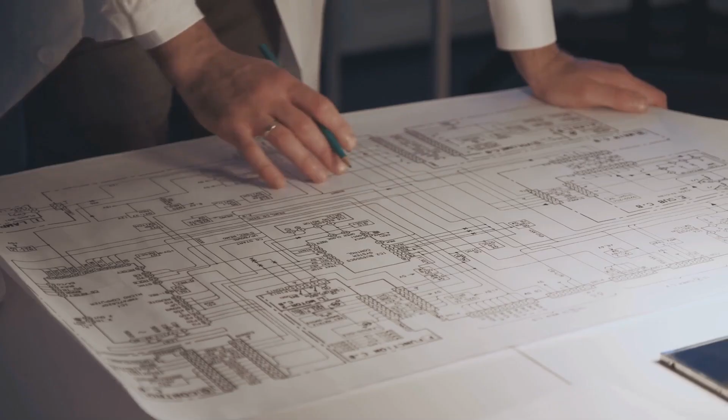But have you ever wondered how these incredible structures come to be? How a wild idea transforms into a twisting, turning reality? It's not magic, it's the result of brilliant minds, powerful tools, and relentless creativity. Teams of engineers, designers, and builders work together, solving problems and pushing boundaries.

The first roller coasters were Russian ice slides in the 1600s. Simple wooden ramps, packed with snow, letting gravity do the work. The French added wheels, making the ride smoother and faster, and by the 1880s, America had the Switchback Railway at Coney Island, a sensation that sparked a new era of amusement.

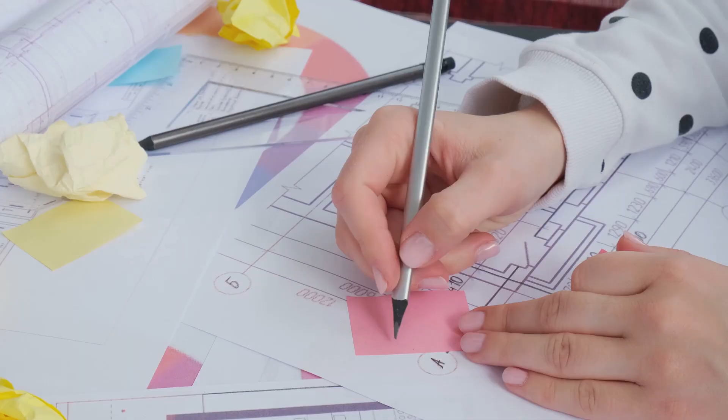Every coaster, from rickety woodies to sleek steel giants, starts with a single spark, a what-if moment. What if we could go higher, faster, or twist upside down? What if we could launch riders like rockets using magnets instead of chains, blasting them forward in an instant? What if the track dove underwater or soared through fire or spun riders in ways they'd never imagined?

Designers dream big, imagining not just the ride but the story, the theme, and the feeling they want to create, turning steel and wood into pure emotion. It's not just about speed or inversions, it's about crafting an emotional journey, a memory that lasts long after the ride ends. These creators are architects of adrenaline, fueled by wonder and a passion for pushing limits, always searching for the next big thrill.

Every ride begins as a wild idea, a sketch on paper, before physics and engineering bring it down to earth and make it real. And that's where the real adventure begins, when imagination meets reality and the ride of a lifetime is born.

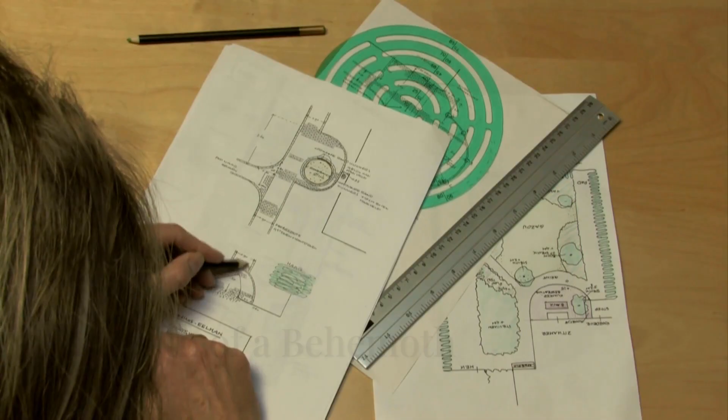With the big idea in place, designers gather around their desks, pencils in hand, and start sketching. Rough, energetic drawings that capture the ride's flow. These early sketches are where imagination runs wild, and every line on the page hints at the adrenaline rush to come. They map out drops, turns, and loops, translating excitement into visuals. Each curve and twist is carefully considered as the team imagines how riders will feel at every moment.

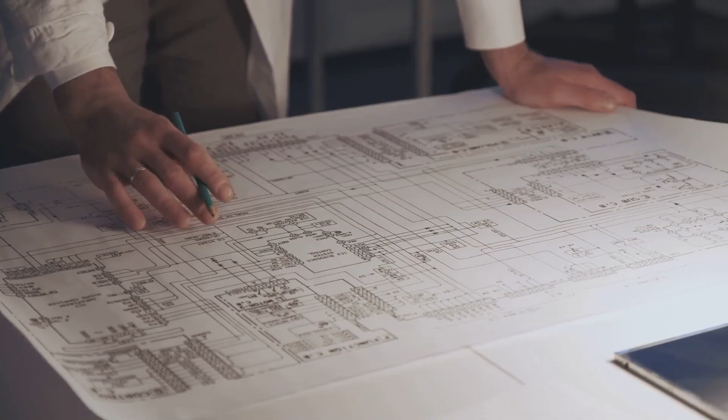But reality sets in. The ride must fit a specific plot of land, weaving around other attractions and obstacles. The available space is often irregular, forcing designers to get creative with the layout. It's a massive, three-dimensional puzzle, balancing creativity with constraints like height limits, noise regulations, and budgets. Every decision is a compromise between what's possible and what's permitted. The raw vision is refined, every square meter counted. Designers must maximize thrills while making the most of every inch of available space.

Engineers step in, running calculations on G-forces, balancing thrilling airtime with safety. They analyze how the ride will feel, ensuring it's intense but never dangerous. Using advanced software, they model the train's speed and forces at every point, ensuring the ride is both exhilarating and secure. Simulations help predict how the coaster will perform long before a single piece is built.

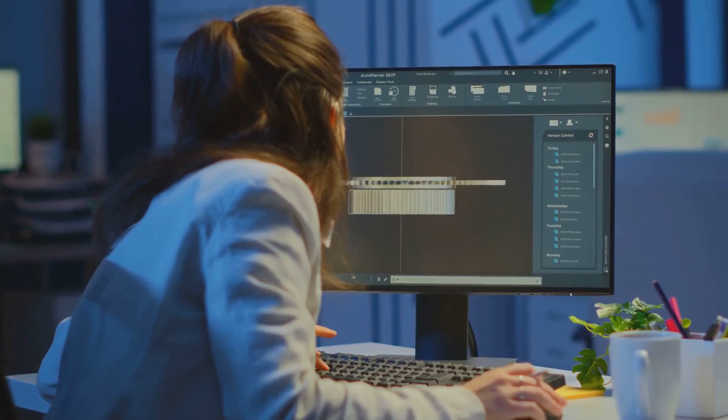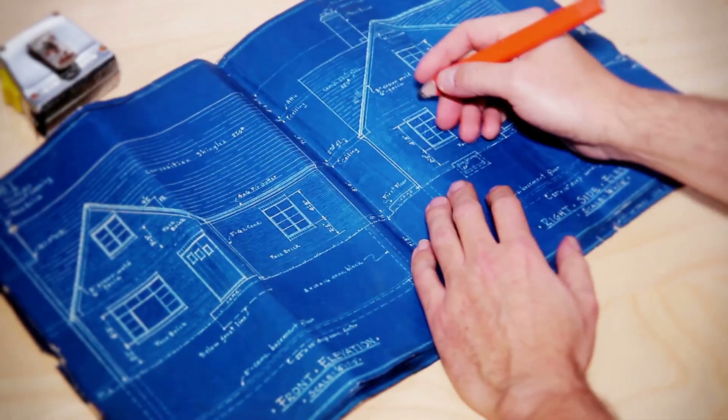The result? Incredibly detailed blueprints, filled with technical notes and precise measurements. Every support, track segment, and bolt is specified. Nothing is left to chance, each component is accounted for. The blueprints show exact angles, heights, and materials down to the last nut and bolt. These documents are the master plan, the culmination of months of creativity, engineering, and science working together. They turn an abstract dream into a buildable reality, bridging the gap between fantasy and the physical world.

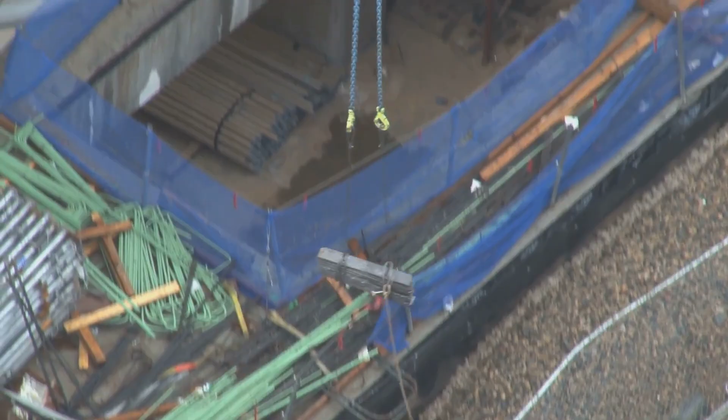Now the vision is ready to leave the drawing board. The design team hands off their plans and anticipation builds. The next step, bringing it to life, piece by piece. Steel arrives, and the first supports rise from the ground. The journey from sketch to steel is about to begin, as the behemoth takes its first steps toward reality.

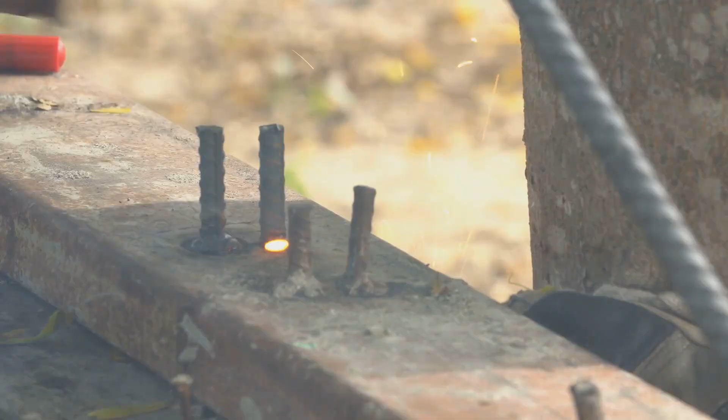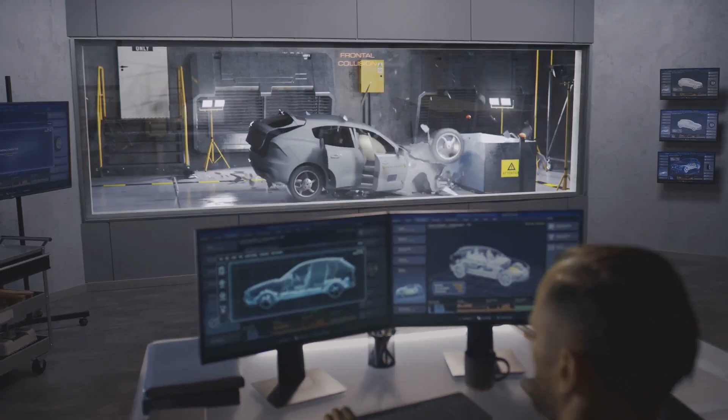Before any steel is forged, before a single bolt is tightened or a track is laid, the journey of a roller coaster begins with imagination and precision planning. The entire coaster is first constructed in the digital world where ideas take shape and concepts are brought to life on screen. Engineers meticulously craft a flawless virtual model, capturing every bolt, every curve, every seat, and even the smallest design details. This digital twin allows them to test the ride from every possible angle.

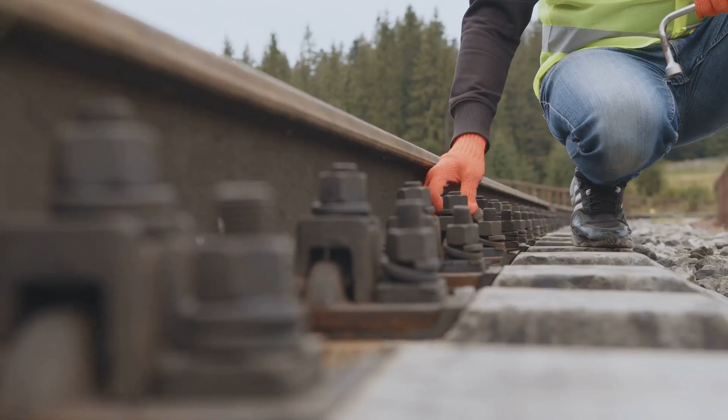Running countless simulated trains to analyze G-forces, speed and safety under a variety of conditions. Adjustments are made in the software, tweaking turns, raising hills, and refining the experience to maximize both excitement and comfort for future riders. Advanced simulations check clearances, ensuring that no part of the train or any rider ever comes too close to supports, scenery, or other elements. Safety is always the top priority.

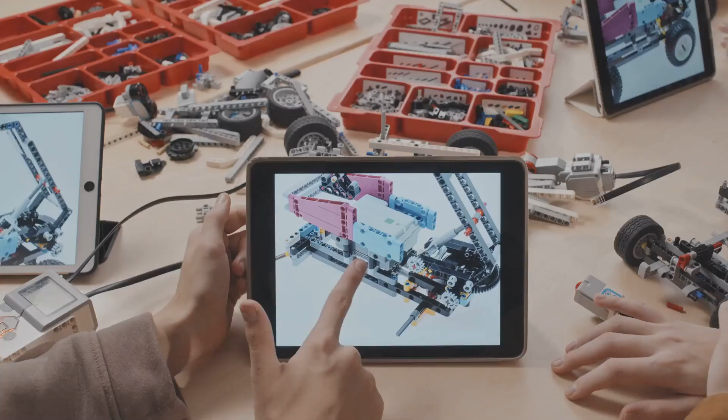Sometimes a physical mock-up of the train seats or a unique track element is built, allowing engineers and designers to test comfort, ergonomics, and safety in the real world. For especially innovative features, a full-scale prototype section might be constructed and rigorously tested, ensuring new ideas work as intended before full production. This seamless blend of digital and physical prototyping gives the team the confidence they need, allowing them to identify and solve problems before the real build begins.

Every detail is scrutinized, every thrill is carefully calculated, and every safety measure is double-checked. Only when the virtual ride is perfected and every test is passed, does the real-world construction finally begin, turning dreams into reality.

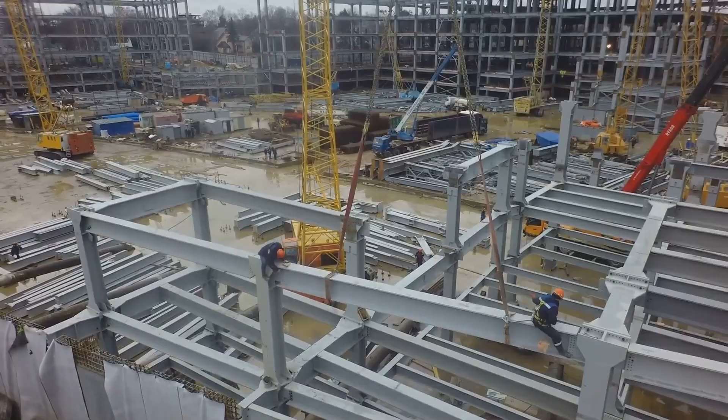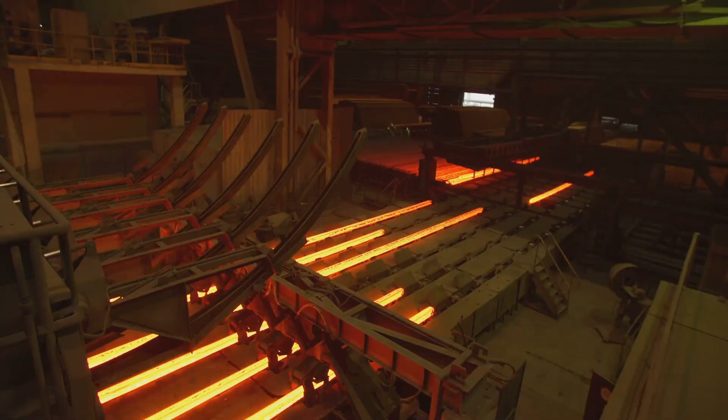With blueprints finalized, the project moves to the factory. Here, raw steel is transformed into custom track and supports. Pipes are bent with hydraulic machines, each segment unique to its place in the ride. Support columns and frameworks are cut and welded with precision, every weld inspected for strength. The quality of these components is critical. They must withstand years of stress and weather.

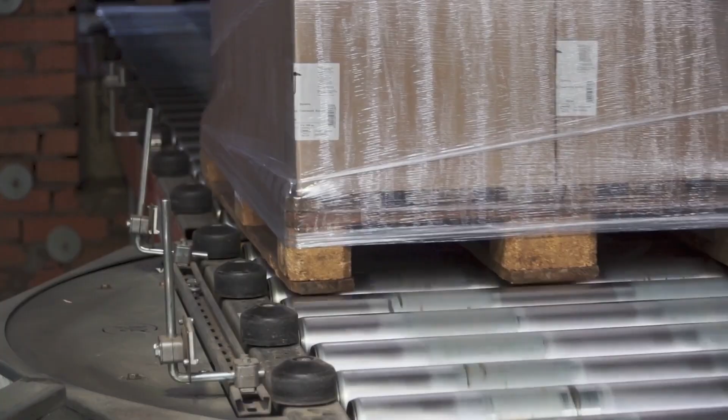Once fabricated, each piece is painted with industrial coatings to protect against rust and corrosion. The vibrant colors aren't just for show, they're a shield against the elements. Every part is labeled, loaded onto trucks, and shipped to the theme park. The steel serpent is ready for assembly. The factory's work is done. Now, the real construction begins. The next phase, turning these pieces into a towering thrill machine. The countdown to the first ride is on.

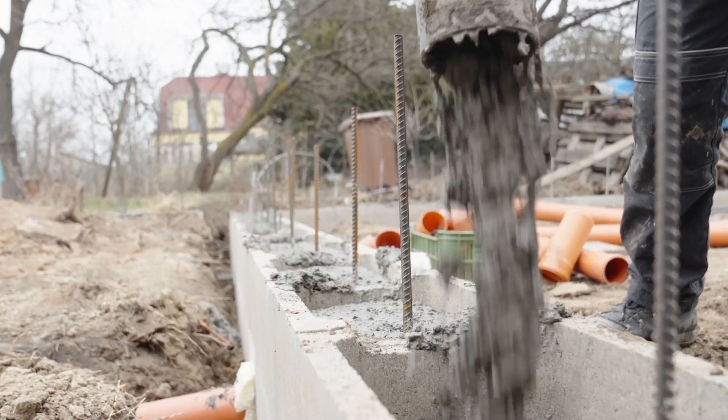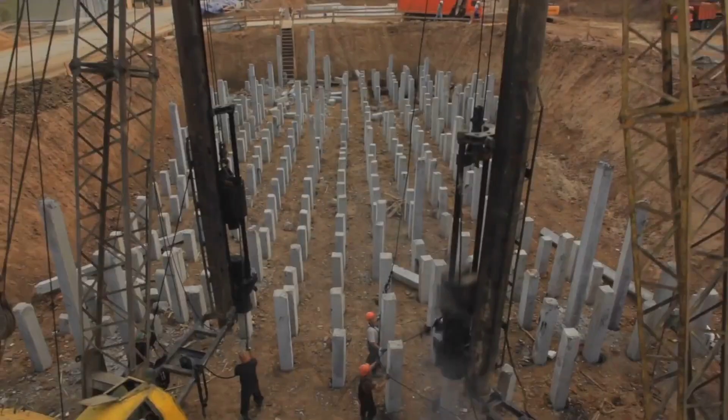At the theme park, construction begins with deep concrete footers, anchors for the entire ride. Towering cranes and skilled ironworkers assemble the puzzle, piece by massive piece. The first support columns rise, bolted to the footers with precision. Track sections are hoisted high, guided into place and locked down with enormous bolts. The structure grows skyward, starting with the station and brake run, then the dramatic lift hill.

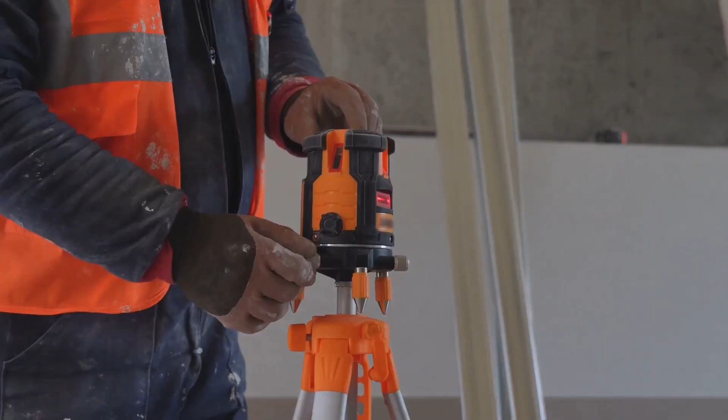Every alignment is checked with lasers and GPS. Millimeter accuracy is crucial. Even a tiny error at the base can cause big problems at the top. Over months, the chaotic site transforms into the elegant shape of a roller coaster. The teamwork and precision are astonishing. Slowly the ride takes its final form. Soon it will be ready for its first test.

With the last bolt tightened, the coaster stands tall, but it's not ready for riders yet. Safety testing begins. The train is placed on the track and sent around empty, sensors tracking every detail. Engineers do a slow pull-through, checking clearances and wheel contact. Then come full-speed runs, gathering data on speed, G-forces, and vibrations. Water-filled dummies simulate passengers, testing the ride under real-world conditions. Hundreds of cycles ensure the train behaves safely with added weight.

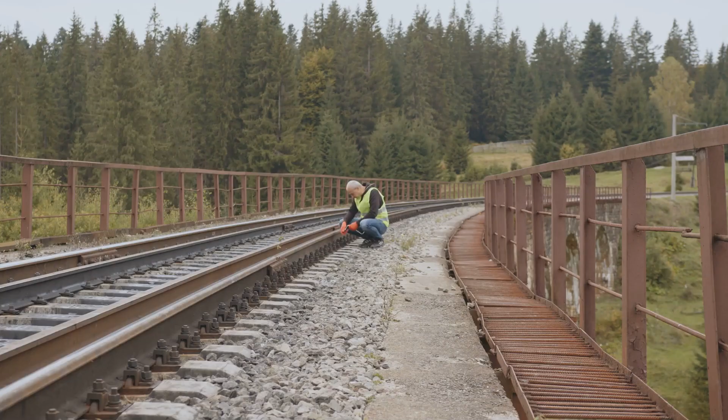Only after thousands of successful test runs do humans ride. Engineers and maintenance staff first. They check for unexpected bumps or sounds, making final tweaks. Government inspectors conduct their own audits, reviewing every safety detail. Only when every test is passed is the ride certified for the public. The anticipation builds. The moment of truth is near. The ride is ready to thrill.

Opening day arrives, the culmination of years of passion, precision, and teamwork. As the train climbs the lift hill, it carries the dreams of everyone who built it. Every cheer and scream is a tribute to their effort. Roller coasters are more than machines, they're moving sculptures, blending brute strength with delicate finesse. Each ride is a system of 1,000 parts, working in perfect harmony.

Next time you strap in, notice the complexity, the safety, the artistry. You're experiencing the result of creativity, science, and collaboration. Building a roller coaster is an act of optimism, a belief in fun, wonder, and pushing boundaries. From Russian ice slides to record-breaking giants, these rides tell the story of human ingenuity, and every ride is a celebration of our relentless pursuit of the perfect thrill.